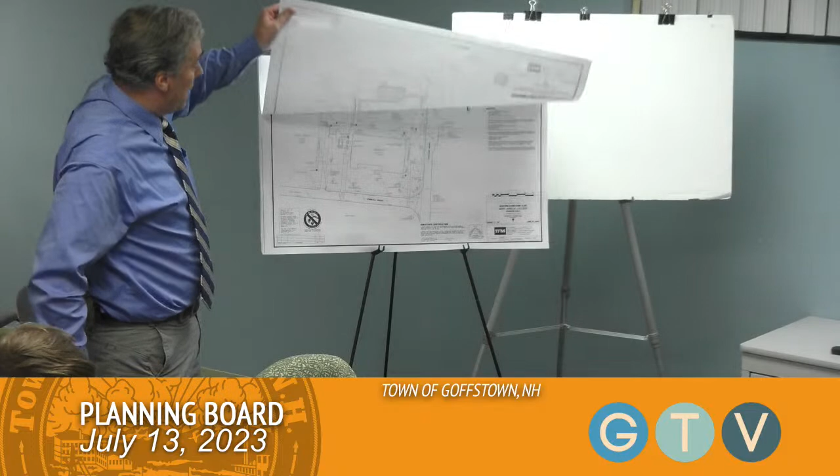Thank you. And to come back to your earlier question, Mr. Chairman, the existing building is 35 feet high to the peak of the roof. Okay, thank you.

All right, so we are seeking a number of waivers. I'll get into those more in a few minutes.

Bold lines here are the property lines. So parcel 341 is this main piece of land here with most of the academic buildings on it. This adjacent parcel with the Abbey Church is owned by the monks. They also own a couple other pieces over here. There are a number of parcels that make up the campus.

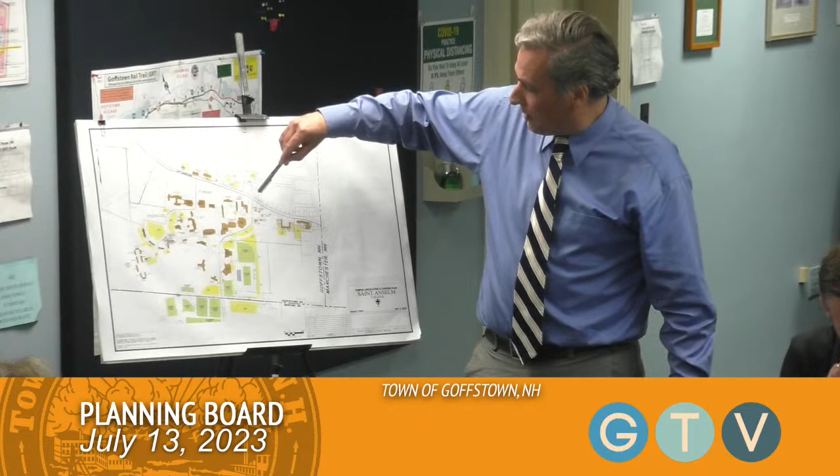In fact, the campus owns all of these parcels on the other side of St. Anselm's Drive as well, and owns a couple parcels. This is the Goffstown Bedford town line on the south side here. They own a couple of parcels on the Bedford side as well, including the recently acquired Clark Farm parcel, which this parking lot here is located on. And a number of athletic facilities—this is Rundlett Hill Road that passes through the site.

West of Rundlett Hill, there's a number of athletic facilities in Bedford. This is the Manchester town line. This is the Institute of Politics right here, so the Manchester town line is just east of the Institute of Politics. So we're located right down in the corner of town. That's the site orientation.

I'm going to turn it over to Mike to talk about the functions of the proposed building, and your floor plans are behind here—three rendering sheets too, and floor plan.

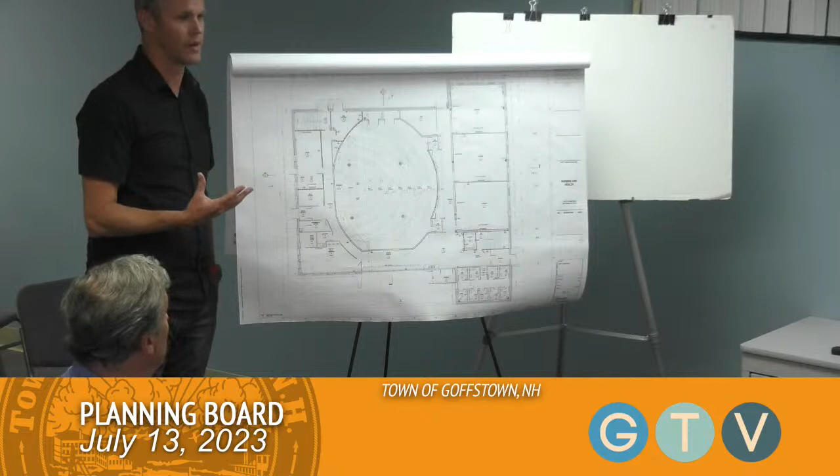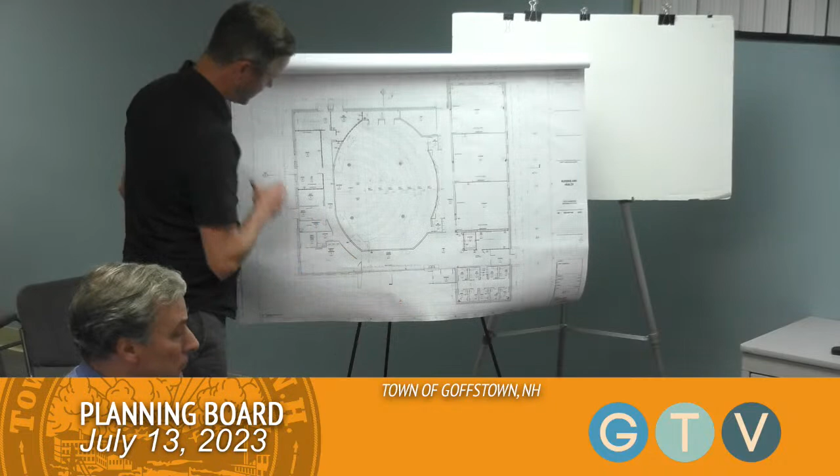Okay, so this is the ground level, or level 1, and the main purpose and function of this space is assembly. It's all common use spaces for students, classrooms on this wing—I reference this wing because it's a core element as it goes up to the floors above. Here on the west side, close to the Geisel Library—sorry to reorient you—east side is College Road, the main quad is here down page south, and the Geisel Library is here on the west elevation. And we have the utility spaces here, creating a utility core.

Moving up to the second floor, the main function is the simulation center, which is the key part of what this nursing program is trying to energize. The majority of these spaces—there are some student commons here, but the majority is going to be the simulation center, predominantly just for the nursing students and the new program they are bringing on here at Saint Anselm College. And as we move up to the third floor...

This is again focused back here on this bar, which is all classroom and lab space, and then as you sprinkle this way, this is the faculty component. One of the key program elements we were challenged with is providing office space for the faculty, but also having this interaction with students, because they want a very open dialogue as part of one of the main mantras of the school. So this is predominantly one of the core programs that brought us to a 3-story piece, being able to stack all these components: first floor being assembly, second floor predominantly for nursing students—that's kind of their floor—and the third floor being the office space.

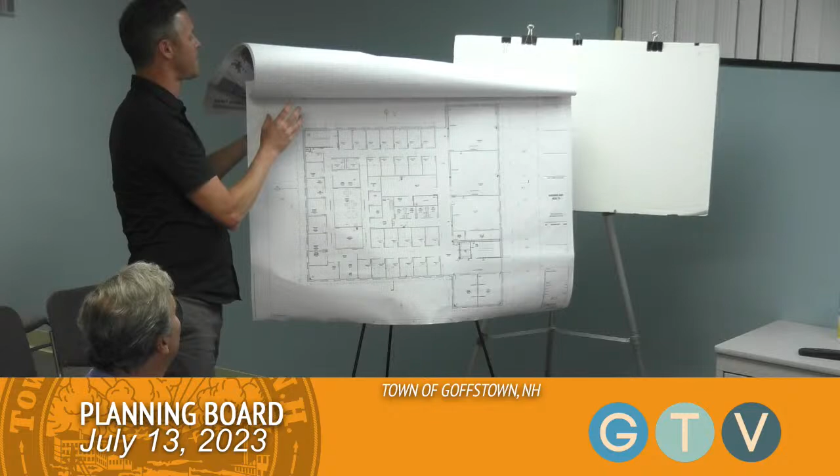We showed you the entry perspective here. You can see from College Road.

The material vernacular we tried to incorporate is very common on campus: a red brick facade, using a ground face or split face ground block at the lower levels. We'll have some infill panels, possibly metal that could patina over time, because that's a very common material on campus. Again, we want to have heritage elements is what we're after.

This would again be College Road, making a turn here to the south elevation, where we have a strong presence to the quad, which is important. We want to have a dialogue between activity happening here on the quad and this large punched opening, which is a glazing opportunity to see what's happening inside.

That big auditorium space we're talking about, the live action with student life, you'll be able to have that interaction between inside and outside — a key element we felt was important. As we talked about, the student experience happens not only on the outside, but the inside, and how this building relates to other buildings on campus. That's the library shown on the left there.

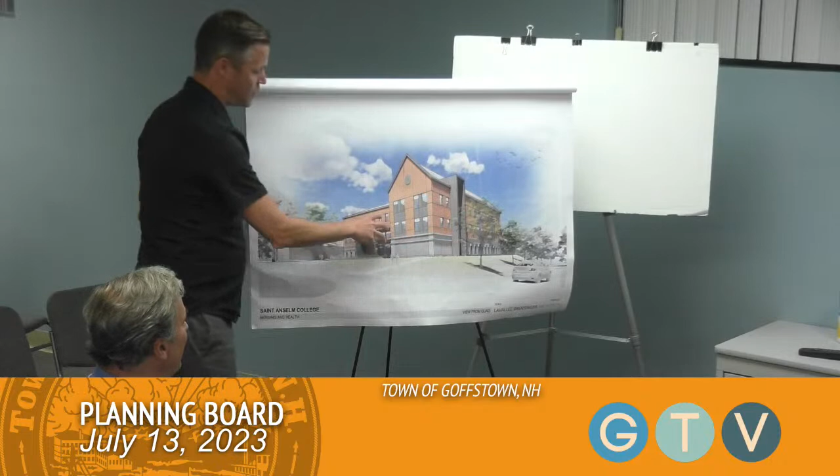There's a very prominent vertical feature there — what is that? So, back to your question, that's the rappelling wall? Yeah, right. Just as much as we want to identify this as one of the main entrances, or the main entrance into the building, these large elements — and once you go to the next page, I'll show you as well — this is also where the stair tower is.

As you think about the plan, you're trying to introduce a lot of light into the interior of the building. We feel like health and wellness, student activity — all of those components that promote a strong learning environment and a place of activity for students — is what we're after. So this large vertical element here is actually the stairwell behind that.

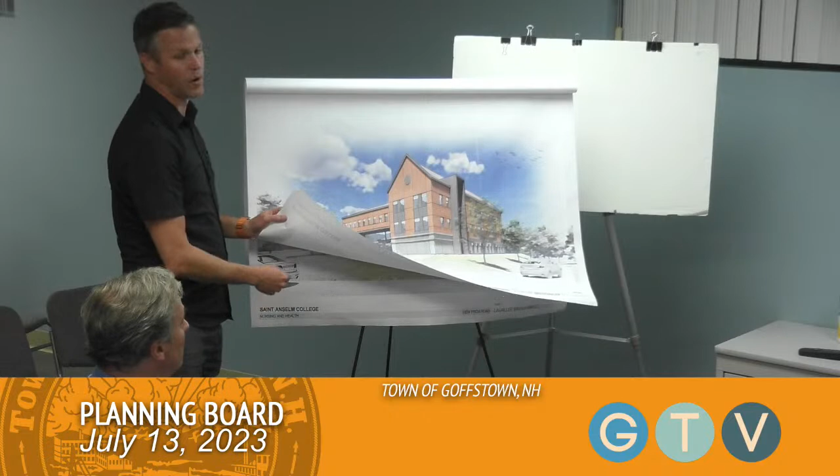This is the north elevation, but also a very important perspective when it comes to how this building is viewed from the outside — and I say outside because it's just outside of campus on St. Anselm Drive. Again, going back to the comment about these vertical pieces, those are stair elements. Stair element here, but this is also an opportunity for getting light within all the corridors, that classroom bar I was pointing out earlier.

One thing we're being very sensitive to is the view of the rooftop equipment that will be on this roof. So we're making a concerted effort to push the equipment as far back into the plan as possible, so the view angles from St. Anselm Drive are minimal. I can't say there won't be anything, because there will be.

The lawn there is about 390 feet wide from the road back to the building, so the roof element's going to be set back quite a ways. If you're approaching driving up Saint Anselm Drive to make a left onto College Road, your view of the rooftop equipment would be obstructed because this form would block that. And as you're coming from the south or west, you'd also have that view opportunity.

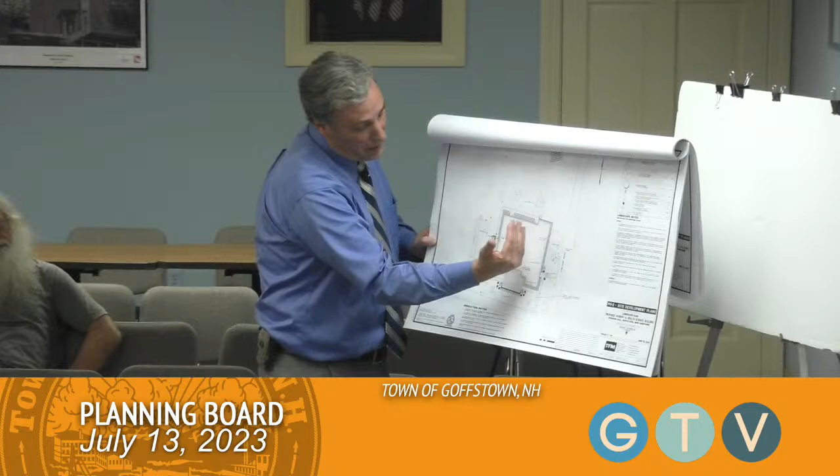Landscaping, let's jump to the landscaping plan. Because it's the north side of the building that's moving out, and the south facade pretty much lines up with Geisel Library and the existing, and the east and west facades pretty much, most of the expansion is this way. We unfortunately have to lose all the trees on the north facade.

We'll be replacing those. There's a couple trees on the west side that we are going to try and save. I think we've decided that we have to lose these two from the plans that were submitted that show losing these, keeping these 3 trees on the quad side. These are the ones we're talking about removing for crane access and construction access. So there's a couple more trees that we've decided are going to have to go that we were trying to save, that it's not going to work out.

And then, so we have shrubs, and then there's, mentioned before, 5% grade wrapping around here. So to separate these two sidewalks, we have a retaining wall here that warps into a little accent wall. We have a 24-inch accent wall around the pedestrian plaza as well for seating. This is not a retaining wall, this is just an accent wall, and this retaining wall kind of warps into an accent wall at the last few feet, last 10 feet.

Those will be concrete walls with a brick facade, right? Yeah, to match with what the facade materials are at the end of the building. So shrubbery around the accent wall here, shrubbery around the retaining wall, above the retaining wall here, shrubbery here, and then a few proposed trees to replace the ones we're losing. Going to try and keep all the trees along the College Road side as well.

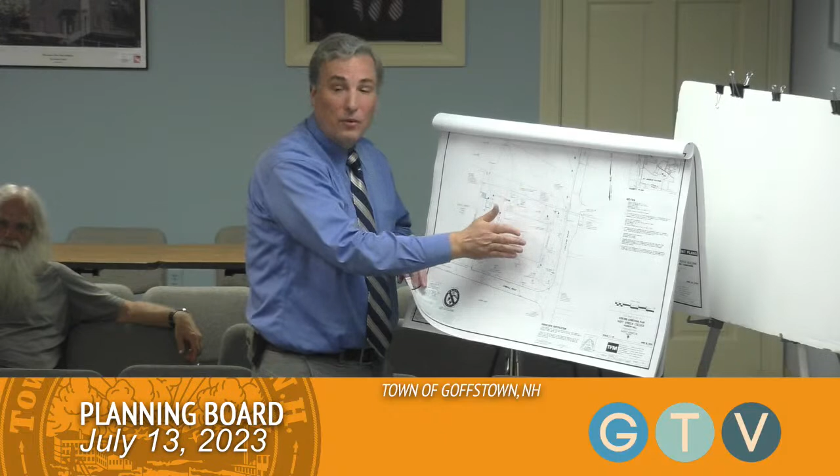So this is the existing Poisson Hall. There's a sewer line that serves Geisel Library and Poisson Hall that runs behind here and down into Brooklyn Court, and then there's a water line behind that as well. Further out into the field, there's an electric line and a fiber optic data core for the site. That was one of our key constraints, not to disturb the electric. We wouldn't mind disturbing the water, and we ended up not disturbing it, but we didn't want to disturb the electric and data hub lines out there. That really drove the decision to go to 3 stories rather than 2.

So the sewer line needs to be relocated. Here's that existing sewer, and here's our proposed relocation, shooting out around the back. The building has gas and water, both in proposed and existing conditions.

In terms of drainage, I mentioned already the porous paver here. There's a chunk of new proposed impervious surface for the retaining wall for the ADA access here, and a large infiltration field underground in the field. We'll have to raise the grade slightly of the front field to accommodate that and to accommodate cover over the pipe getting to it. We'll provide a catch basin here to funnel water from the field into the drainage system, but primarily the water that gets to this infiltration system comes from the roof of the proposed building.

There are some areas of the roof that don't get to that drainage system, shooting off the south and east facades.

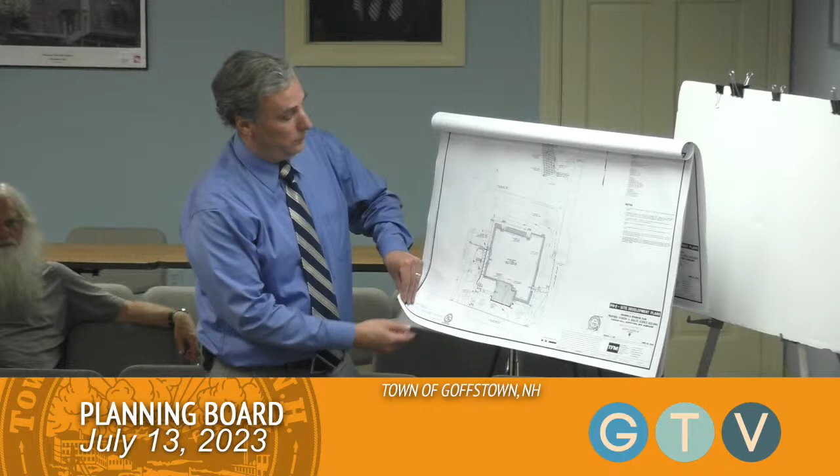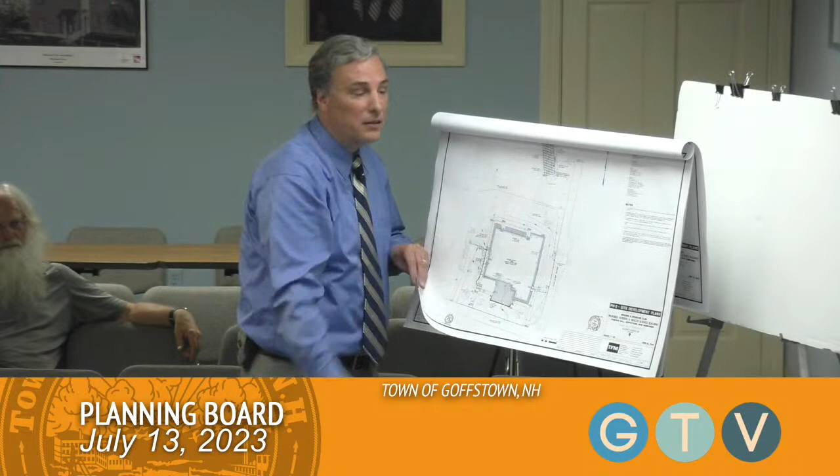The existing drainage system along College Road is actually located on the upstream side of the curb, not in the road itself, and that keeps water from flowing into the road and crossing it in the winter, which would refreeze and cause icing. So those catch basins serve the main drainage function, but they also prevent icing in the winter, which is why they're located behind the curb.

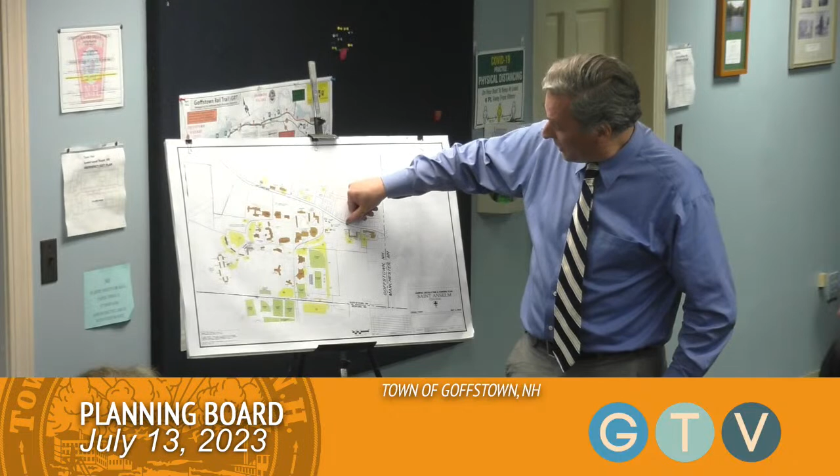Switching over to this view, the drainage line along College Road crosses from the main quad at a 6-inch pipe, then a 10-inch pipe all along College Road until it gets to the gutter line of St. Anselm Drive. It's then 12 inches from this driveway down to Rundlett Hill Road, upsizing to 18 inches down to the residential quad at Marsky Hall, then 24 inches through the parking lot.

There's another 24-inch pipe that comes in from this detention basin. The two 24-inch pipes come together and create a 36-inch pipe, and the outfall of the drainage system is down here behind the Institute of Politics and the residential quad. That's our primary drainage outfall, and it picks up most of the site.

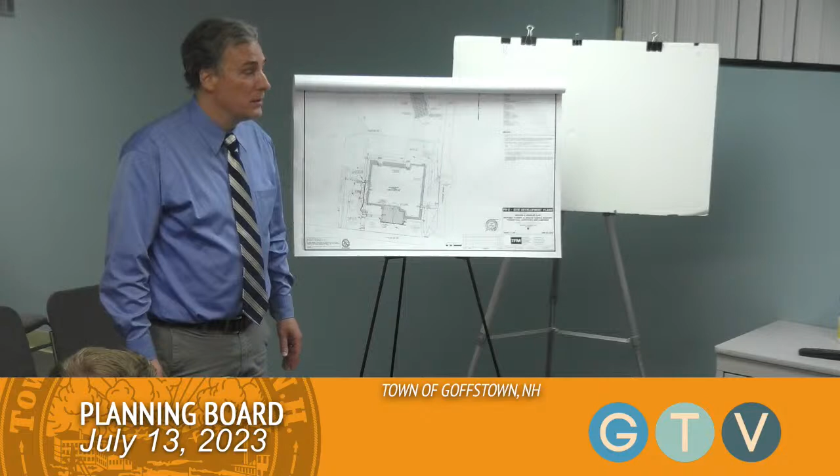That's the drainage snapshot. Our infiltration system is discharging into that existing 10-inch line along College Road. Unfortunately, that College Road line is undersized—we are surcharging in the 25-year storm. Scott and I are going to have to work through that. That's one of the waivers we'll have to ask for, surcharging of the 25-year storm, and we're going to keep our increase in surcharge down to a minimum. I think we're at 2/10 of a foot right now.

So please explain that—you're not changing the dimensions of College Road. Correct. So what's this, this historic impact of surcharge of stormwater? Right, yep, but that has nothing to do with the construction of this. Correct, correct. It's an existing condition where the amount of impervious area running into this, according to our HydroCAD analysis, is a little bit more than the 10-inch pipe can handle. It's not overtopping in the 25-year storm, but it's between the rim and the top of pipe water surface elevations. Is that what your comment is, Scott?

There's quite a few existing structures where the water in the structure is higher than the top of the pipe, so the pipe's technically under pressure at that point. Our regulations don't allow for pipes surcharging even at the 50-year storm, and currently it's happening at the 25-year. The new design actually increases it slightly.

There's even a structure that's overtopping at the 50-year storm, like it's coming out of the catch basin. I don't know if this has been observed to actually be an existing problem, but your analysis shows water coming out of the catch basin. In the proposed condition, it's a foot higher, which means your road's flooding at that point. I don't quite know if it's really what's happening out there or not.

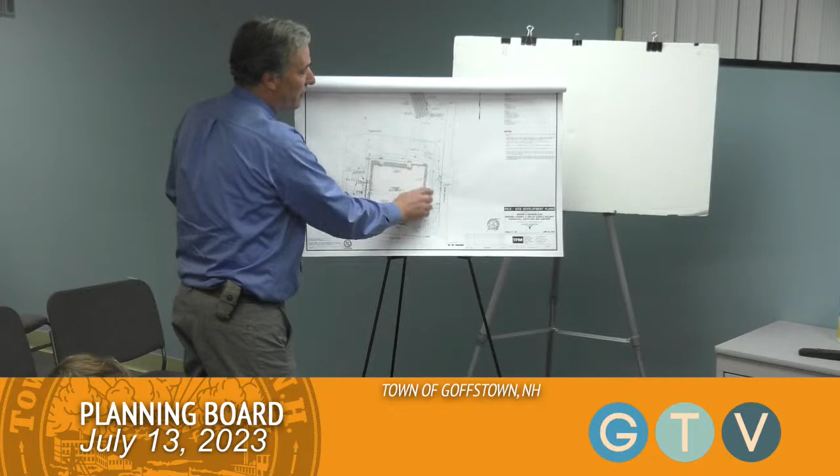The double-edged sword here is the more water we funnel into our infiltration system... well, that's water that used to just flow overland to this gutter line and out onto St. Anselm's Drive.

When we get to the infiltration system, any overflow in the 25-year and 50-year storm passes into our drainage pipe, and now we have more surcharge. So do we want it underground or do we want it above ground?

It all adds up in the end. It all goes to the same place, the same discharge point.

Unfortunately, our system on St. A's is undersized. It's not a good situation. It all handles the 10-year storm.

There's no surcharging, we're meeting pre versus post in the net. Yes, Scott and I have some issues to work through on the surcharge, to figure out exactly how we're going to balance that out. We have to add more units to the system.

It's already a very large system for this type of development. I was surprised how large it needed to be just for that building, to be honest. And plus with the papers, yeah.

I just wanted to clarify something, David. I think you tried to clarify something, but it's not true. You are increasing the footprint of the existing building. There is new impervious area. The footprint is going up by about 20% relative to the existing.

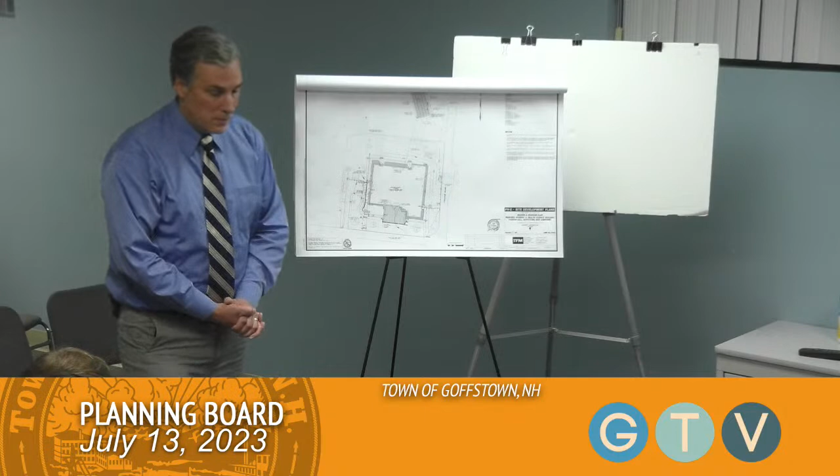I think it's a pretty important decision. If the surcharging is happening within the town system, then I think some remediation needs to be discussed, possibly removing some of that off-site flow, or an improvement to increase the drainage on St. Anselm's Drive to at least accept their water. If they want to have surcharging on their site and have their own streets flooded, that's okay with me. But if the town road and sidewalks are becoming surcharged and flooded, then we need to address off-site improvements as part of an application for a project like this.

I'm not necessarily saying the current icing condition is entirely from this one area. A lot of it just comes off that hill and onto our sidewalk. Well, that's a different drainage issue that has to be addressed, for surface water. It's technically private water coming into the right of way. So that's something I think you have to discuss with them for remediation of the water coming across the sidewalk, and we should know for a fact whether the town's drainage system is surcharging or not.

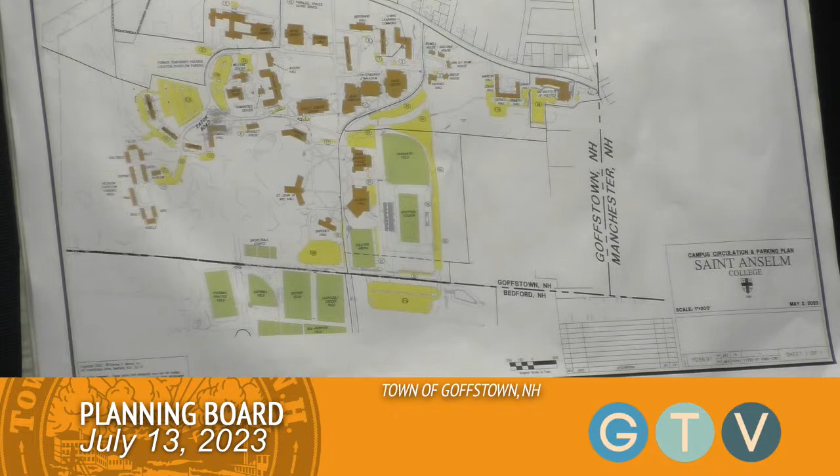So you piqued my curiosity with the 36-inch redwood. Can you point to where it is on the site plan? And is it illustrated in one of the photos? I wouldn't think redwoods would live here. That's on the site plan right here, inside the corner of Geisel Library. Okay, so about halfway between the corners of the two buildings. Yes, I think photo 9. Photo 9, you think? Yeah, because that's tree 422, and I think that's what's labeled on here.

One point on Alumni Hall I forgot to make, sorry, jumping back to the height variance. Alumni Hall is the tallest building on campus at 72 feet to the peak of the roof line. The clock tower is a bit higher, but we don't have a measurement on that. If Phil was here, we'd know the height of the clock tower.

So he didn't answer your question about which tree it is. He's looking for it, photo number 9. Geisel Library, the one on top? Yeah, there's Geisel Library, and this is the big tree in the middle of the picture. It doesn't look like a redwood. It looks like the ones out west. It's not that. All right, that's what they told me.

Does staff represent that this is ready for approval tonight? No. So we're recommending it be continued. All right, so I got the overview, we'll do public comment and continue this, but I'd like to ask a question, because in the staff report on page 18 you have approval conditions, but they don't seem to include all the comments and conditions that came in. Is that because you're anticipating this will be continued and those will be taken care of? That was confusing to me when I looked at it. Some things are boilerplate, a constant template I keep on there so I don't lose them later, but yes, more will be added. So staff recommendation is that this should be continued.